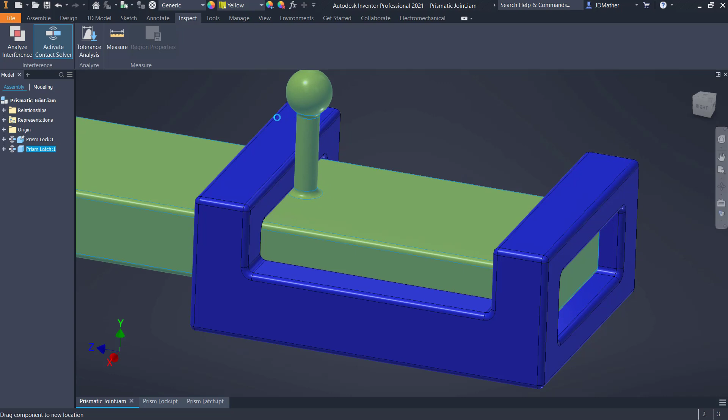In this lab, I want to demonstrate how to create a prismatic joint. So we could put the two parts into an assembly, and put a contact set on those two parts, then activate the contact solver. When we drag this over, it stops when it comes in contact there, and when we come in contact over here. But we don't get any physical dynamics in the assembly environment.

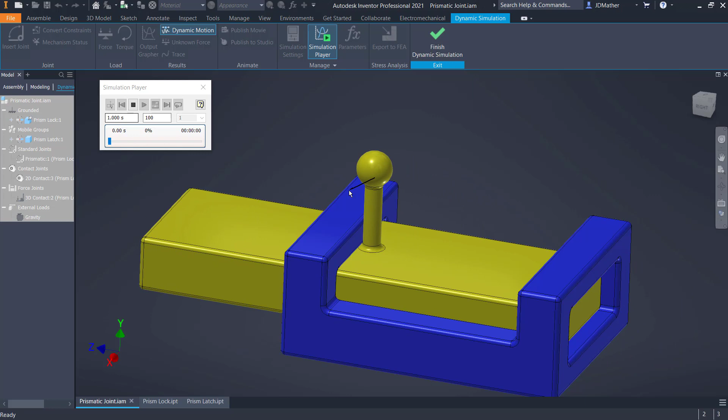It's always a good idea to turn off the contact solver once you have tested out the contact sets. So I'll go to dynamic simulation, and I've set up a 2D contact on this like we did with the revolution joint. Similar to the revolution joint, there is 1 degree of freedom, except instead of being a revolve, it is a prismatic or straight line motion.

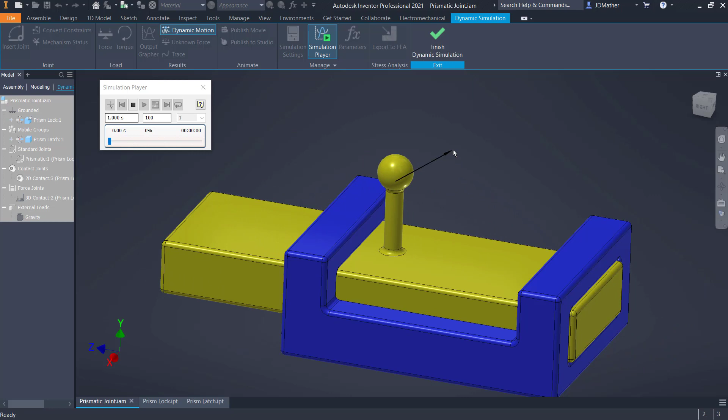And again, we get a force vector on here. The further out we pull on that vector, the more force, and the direction of the force is determined by the direction of the vector. We'll also see in this lab how to adjust the amount of bounce that occurs when we come in contact between the two parts.

If I go to that prismatic joint and look at its properties, we see that it has 1 degree of freedom, and the T stands for translation. So it has one translational degree of freedom. We'll adjust some of these other settings in later labs.

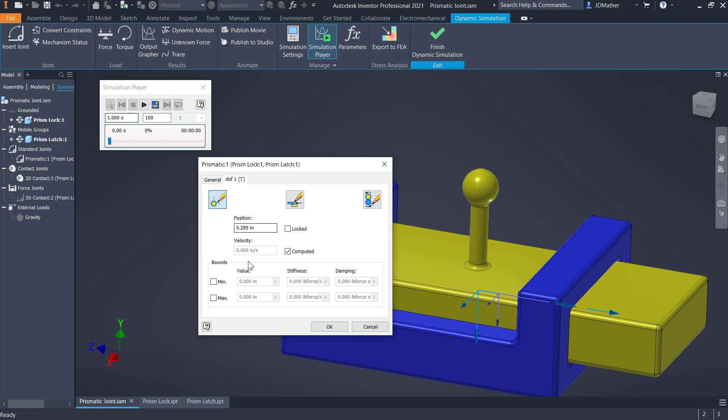So let's look at how to set this up. Again, I'm going to start from a very basic beginning, and we'll work our way up to more complex problems as we go along.

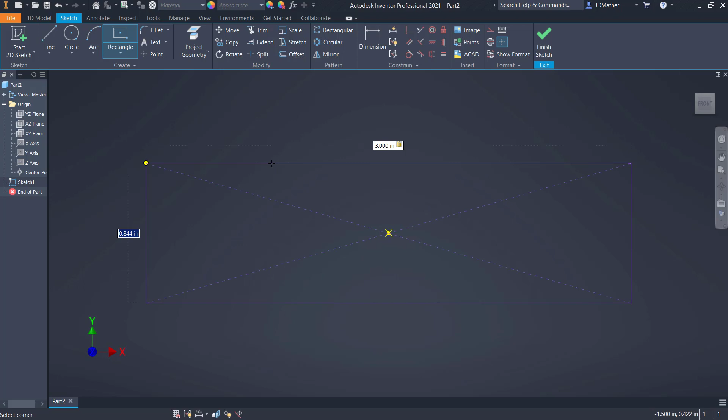So I'll start a new part file, and start a new sketch on the XY or front plane. I will draw a center point rectangle, and make the width of this rectangle 3 inches, and the height 1.5. Then I'm going to draw a second rectangle, making the width 2 inches and the height 0.75.

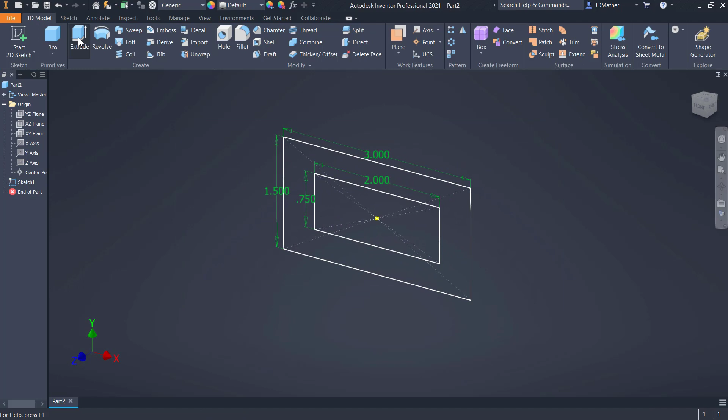My sketches are fully defined. I will do an extrusion, extruding this area. I'll do symmetric, and go a distance of 4 inches.

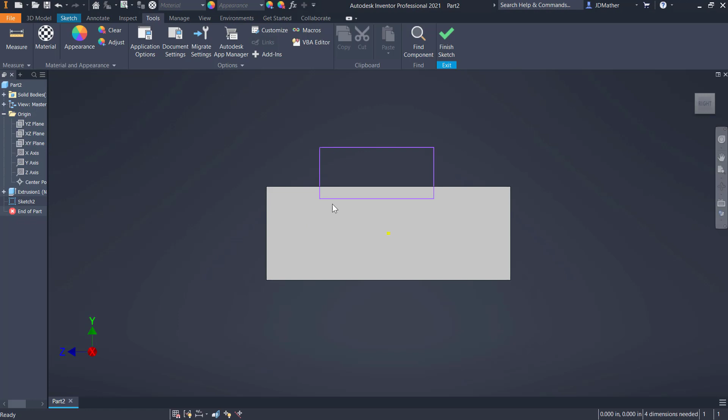Then I'm going to go around to the right side view, and start a new sketch on the YZ plane, and draw a rectangle—this time a 2-point rectangle—and put this rectangle out here in space initially. Now, if you can't see the sketch through your part, underneath Tools, Application Options, on the Sketch tab, increase the opacity of sketch displayed through the shaded model so you can see it through the part. Otherwise it will disappear. You could also hit F7 for slice graphics, which also allows you to see through the model.

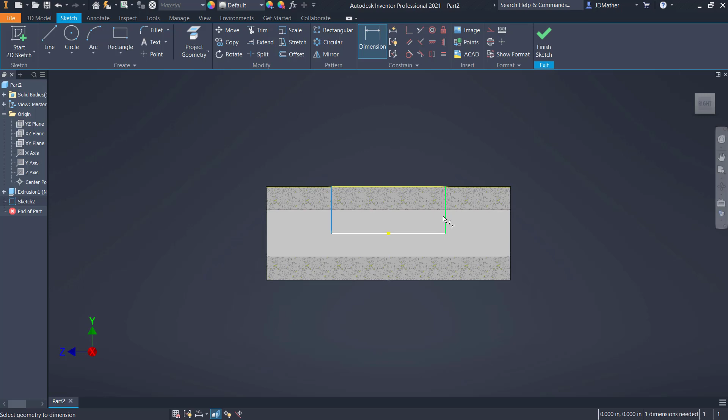I'll go back to my sketch, and do coincident from the midpoint of this bottom line on the rectangle to this point right here. I'm also going to do coincident from this point to the top of the part, then dimension the distance from here over to here, and let's set that dimension as 2.75.

I'll then do an extrude cut through all. So I'll do extrude, and tell it to do cut midplane through all. I'll say OK to that.

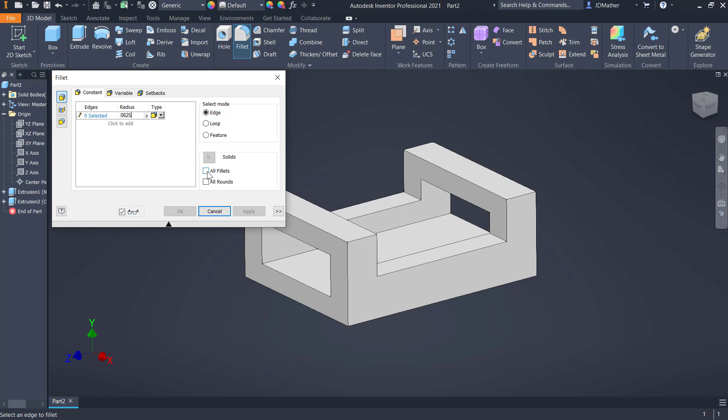I then want to fillet the part, so I'll do fillet of 0.0625, and select all fillets, all rounds, and we'll say OK to that.

Let's go ahead and save this part, and I'm going to call this part Prism Lock. Let's change the color of this part—I'm going to do this as blue wall paint glossy—and save my file again.

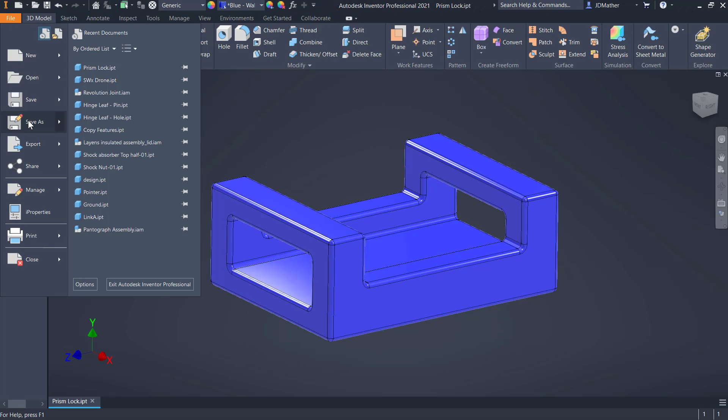I will then save a copy of this file, doing save as, and I'm going to call this one Prism Latch.

Make sure now that you are editing your Prism Latch and not the Prism Lock. I'm going to change the color of this one to yellow—you can make it whatever color you like—and I'm going to drag the end of part marker up underneath extrude 1.

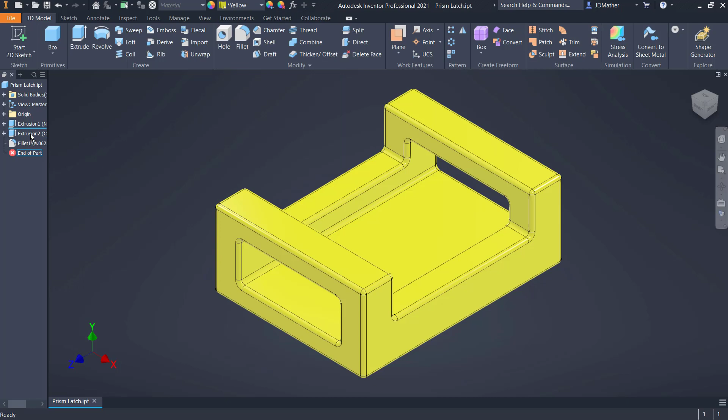I'm going to edit that feature for extrude 1. So I'll say edit feature, control-deselect this area, then select this area here, and change that distance to 6 inches.

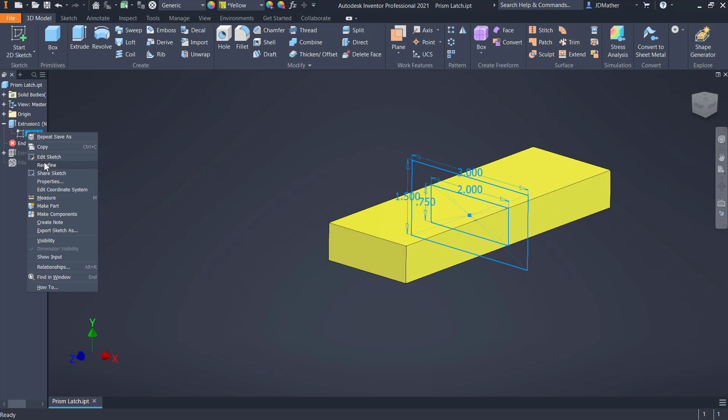I want to add a little bit of clearance between the parts, so let's edit that sketch as well. This was the same sketch that we used to make the mating part. I'm going to subtract 5 thousandths from this, so minus 0.005 inches for this one, and minus 0.005 for this one. So I've added 5 thousandths of clearance.

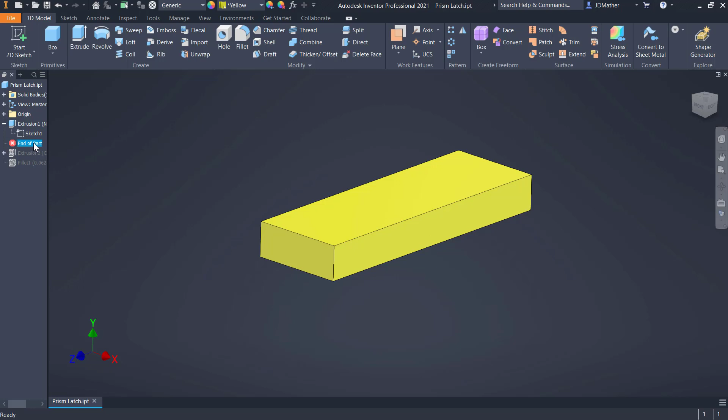I'll then drag my end of part marker down, and edit this sketch. I'll delete this line. When we see a magenta line—magenta or pink—that means that geometry is sick.

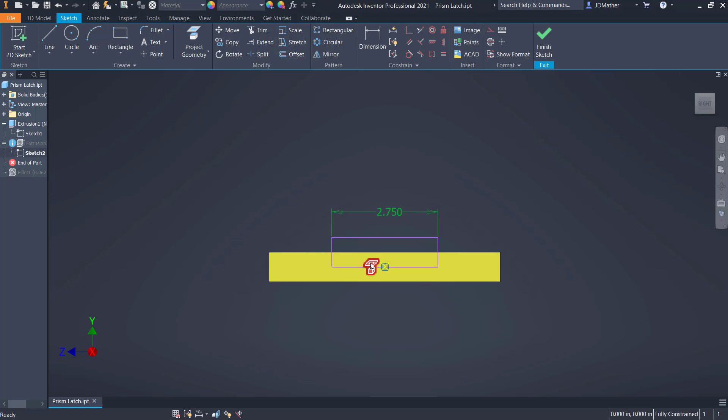I'm going to delete that. We changed the previous geometry, and I'm going to change this rectangle as well. I think I'll delete the coincident constraint, and now I can move this rectangle around. I'll delete this point, and it might have been easier just to create this rectangle over again, but I want to make sure that we see clearly how to do some various steps.

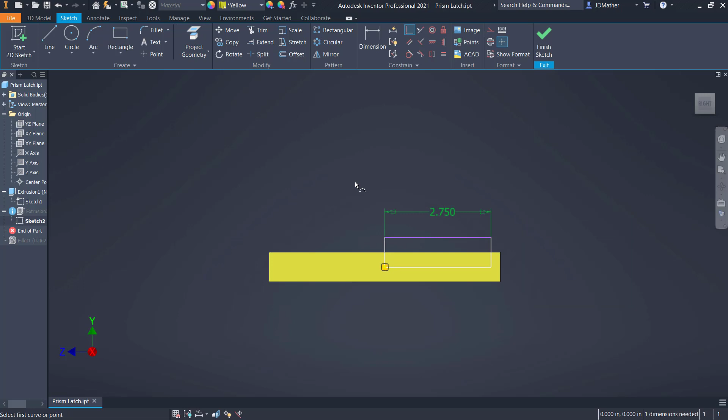I'll do project geometry, and I'll project the center point again, and this time I'm going to do coincident this corner to the center point, and I might hit F7 to go to slice graphics. And instead of this being 2.75, I'm going to put that in as a diameter dimension.

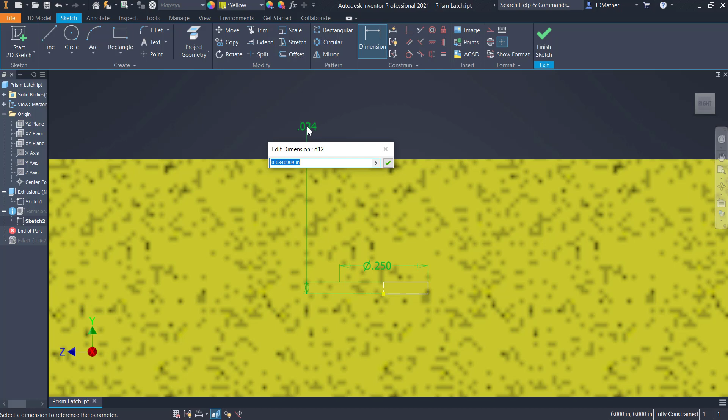I'm going to right click on this line and change that to a center line, and then I'll do a diameter dimension of 0.25. Then I'm going to dimension the height of this as 1.75. So now I have a rectangle, 0.25 diameter, height 1.75.

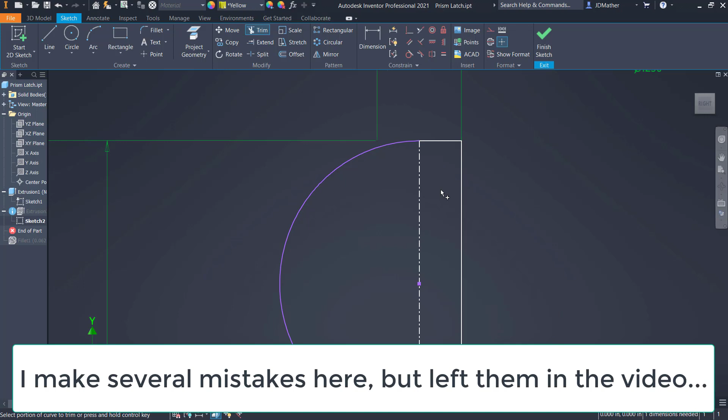I'm going to draw a circle on this line, but not down here at the midpoint. On this line, say from about right here up to about right there. I'm then going to trim away this portion of the circle and this portion and this portion, so I'm just left with this half of it over here, and I will dimension that as 0.25.

I will then do a revolve, but before I do a revolve, let's finish this sketch and delete the extrusion. I don't want to delete the sketch, so make sure you uncheck so that it doesn't delete the sketch.

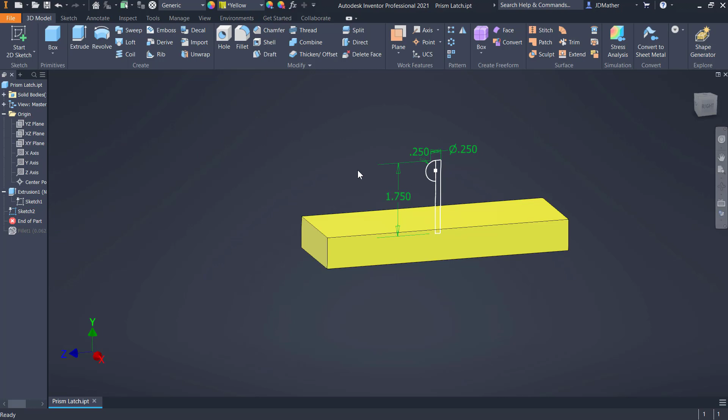I'm going to do another sketch on the right side plane, the YZ plane, and I'll project geometry, this line and this line, into the new sketch, and then I'm going to draw a circle at the midpoint of this line. Actually I might want to put it at a particular location, so let's just put it up here and then over tangent to this line, and I'll change those two lines to projected lines.

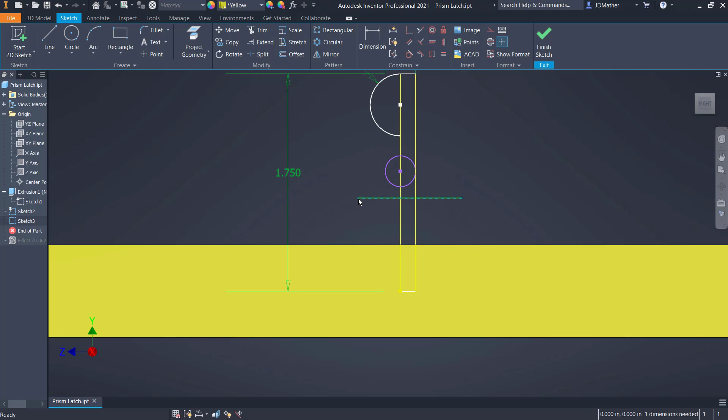Now remember, if I hide sketch 1 or sketch 2, we're now on sketch 3, so we project these two lines from sketch 2, and I've drawn this circle.

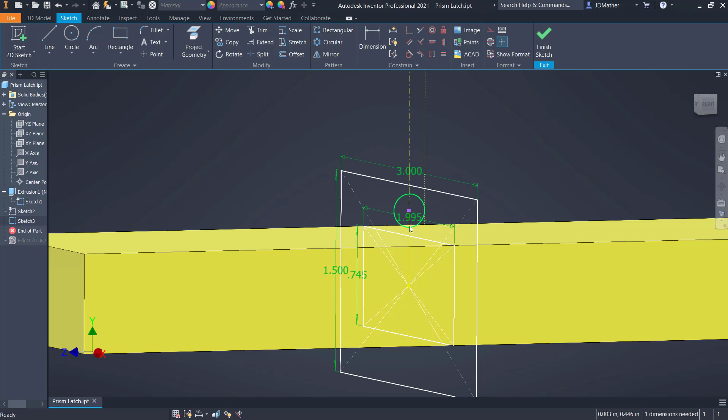Now I want to put that in at a particular height. If I turn on the visibility of sketch number 1, I want this circle somewhere in between here and here, so I just put it in by eye. I'll turn off the visibility now of sketch 1, and then I'll put in that dimension for the height.

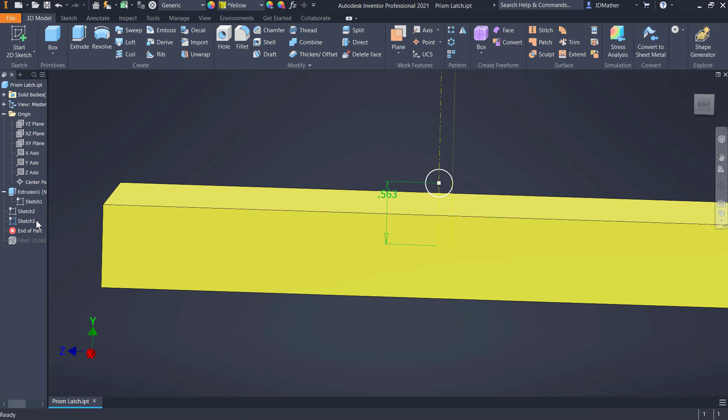So I'll dimension from here up to here, and let's do that as 0.5625. That sketch turns fully defined. Now I'm going to right click and turn off the visibility of that sketch for now, we don't need it. And I'll turn on the visibility of sketch number 2, and then we'll do a revolve.

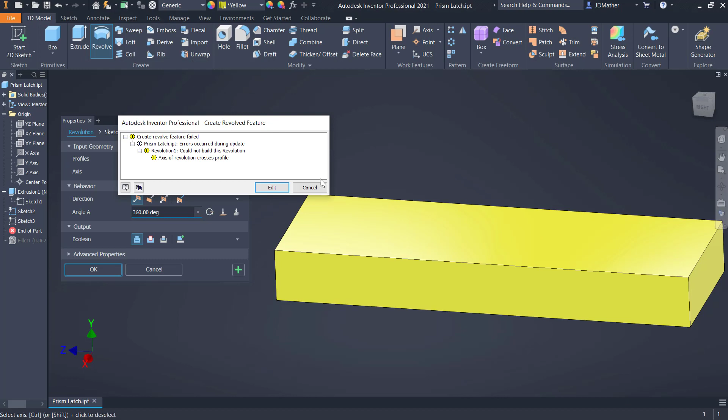I'm going to revolve this area and this area about this axis. And so it gives us an error. It doesn't like that circle being on the other side. So I'm going to edit that sketch, and I will bring this circle back around the other side.

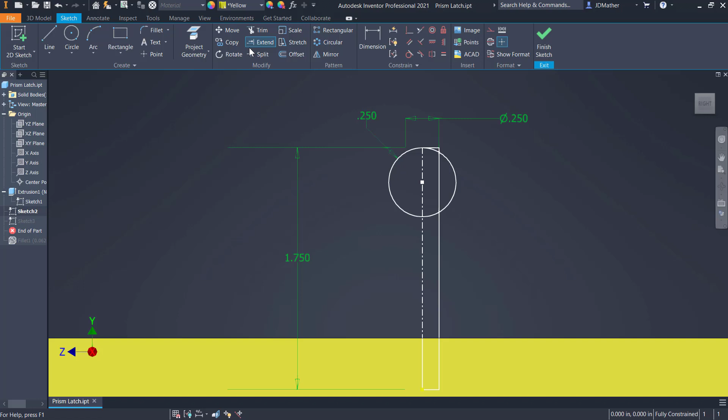So I'll go ahead and do extend and bring that circle, and it doesn't want to extend. There we go. Okay, so I extend that back around, and hopefully we can get that back to a circle, and then I'll trim off this side. All right, now we'll try to do that revolve again.

So I'll do revolve, and I want this area, this area. Now I don't want that corner up in there, and I want that area, and I want that, and now it accepts that. I will drag my end of part marker down for the fillets, and we see that it puts all of the fillets on here, and we will save this part.

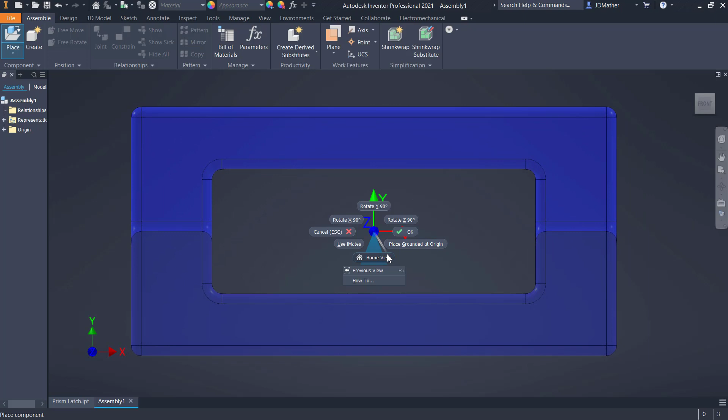Then we'll create a new assembly, and so I'll do a new assembly. I will place the two parts, so I'll place from the prismatic joint, I'll place the lock. I want this grounded at the origin, so I'll right click, place grounded at origin, then hit escape, and then I'll do place, and I'll get the latch, and I'll just click someplace in space to place that latch. Then we'll save our assembly as prismatic joint.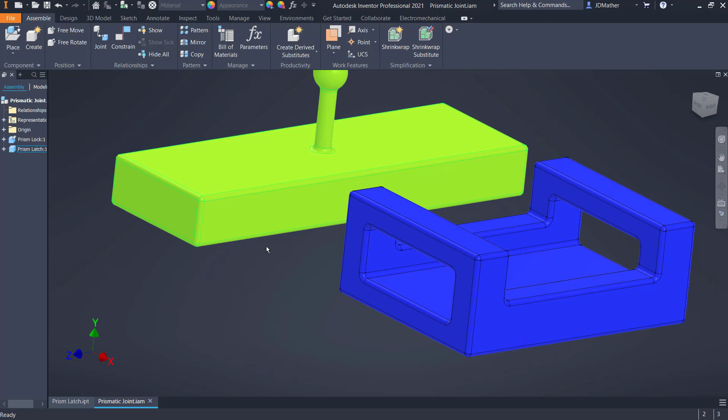Now recall that we allowed some clearance between these parts, so this part is slightly smaller than this hole. In the real world, this face would come in contact with the bottom of that, or the bottom face here would come into contact here, and one side in contact here or over here. In the CAD world, we can use the origin planes to constrain the parts, and that will pay off with a lot of dividends in various things that we do going forward.

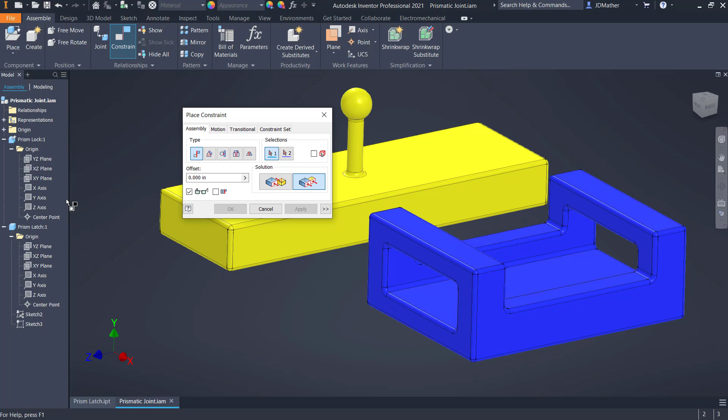So whenever possible, I use the origin planes to constrain my parts. I'll do constrain, I'm going to put it on flush, and I'm going to constrain the YZ plane of the prism lock to the YZ plane of the latch. Then I will do the XZ plane of the lock to the XZ plane of the latch. When I do that, now my part is constrained with one remaining degree of freedom, a translational degree of freedom that we would expect.

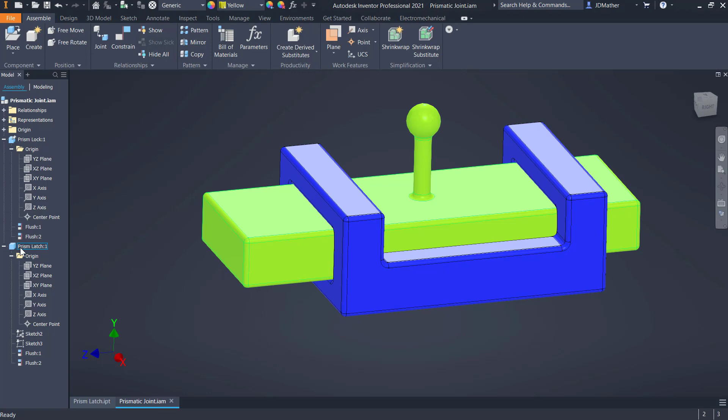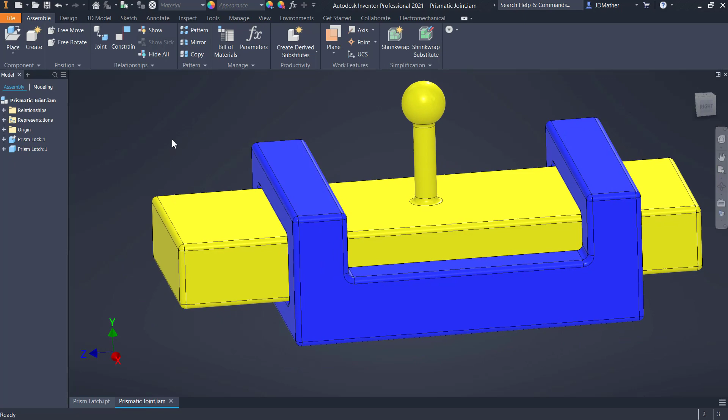Right now it goes right through that part, but if we add those to contact sets, then we see that it will stop when it comes in contact here and here. I did allow a little bit of clearance in between the blue part and the yellow part so that it can slide back and forth. We can't make perfect parts in the real world, so we need to allow a little bit of clearance so that they can move. Even if we could make perfect parts, there would be so much friction between these two parts that you wouldn't be able to move them back and forth.

We'll then go to dynamic simulation, and Inventor automatically converted our assembly constraints into prismatic joints. So if I test it here, it only moves back and forth, but right now it will go right through the part. We'll take care of that in a moment.

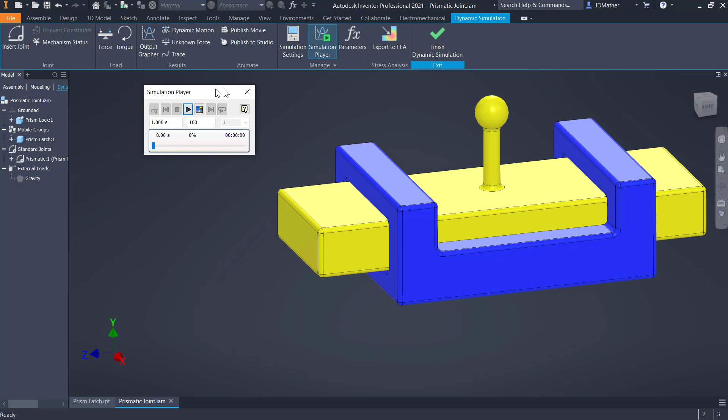We automatically had the assembly constraints converted to a dynamic simulation joint, but let's assume that we wanted to do this manually. Again, if we go into insert joints, you're not going to see all the possible joints that you can apply unless you turn off the automatic conversion. So let's go to the simulation settings. I'm going to turn off the automatically convert constraints.

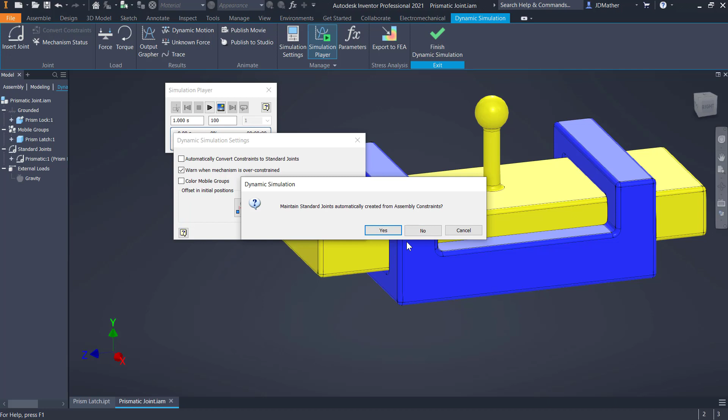Notice right now the latch is in the mobile group, the lock is in the grounded group. I'm going to turn this off, and I'll tell it no, I don't want to keep that prismatic joint. Normally we would say yes, but I'll say no, okay. It moves both of those parts into the grounded group.

I then want to insert manually that prismatic joint. So there are some occasions where you will want to manually put in your joint. I'll select the prismatic joint. Now you can get these, rather than opening up this table, you can get these joints by this drop down list once you know what the names of them are.

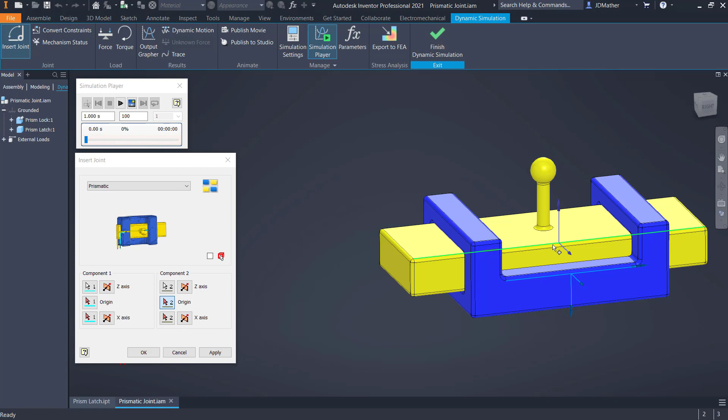Now it asked me to select a Z-axis for this part, for component number 1 and component number 2. But there isn't anything convenient right here to select as a Z-axis. If I select this as my Z-axis for component 1, and then select this as a Z-axis and apply that, it's going to move those two axes together, and that isn't what I want. So I'm going to undo that, and we'll do it a different way.

So I'll do the prismatic joint again, but this time, instead of looking at this in the dynamic simulation view, I'm going to change this to the assembly view, and then expand these origin folders, so now I can select the Z-axis from this part, and then go to the second component and select the Z-axis from the second component. We had to do that by going to either assembly or to modeling tree.

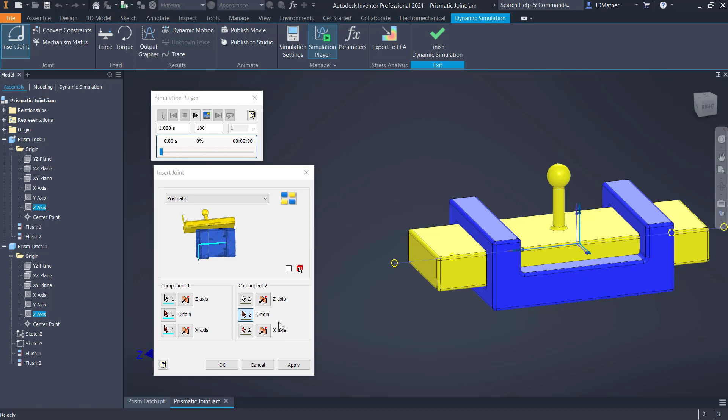If we go to modeling, we can see the same thing, except there's more detail. We only need to see those axes. We'll worry about these origins and these other settings later on. We do need to make sure that the X is lined up with X and Z is lined up with Z, but because we created these two parts in the same orientation, that is already set up by default.

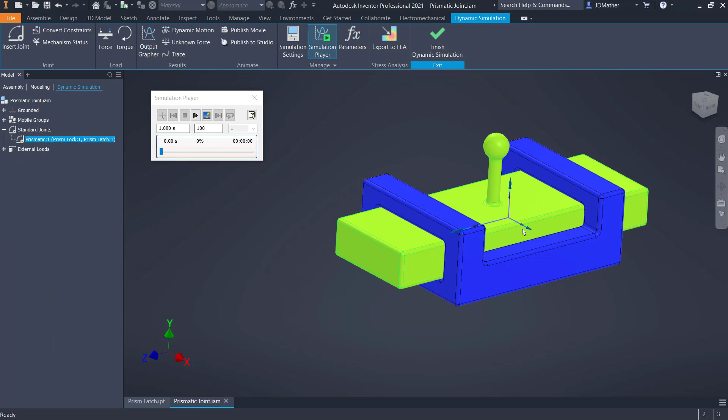So we'll say OK to this, and now we have that prismatic joint. If I come over here to the browser and go back to dynamic simulation, we now have that prismatic joint. We entered it manually, and there are actually 3 different ways to do this: an automatic way, a manual way, and a semi-automatic method. We'll see the semi-automatic method in a future problem.

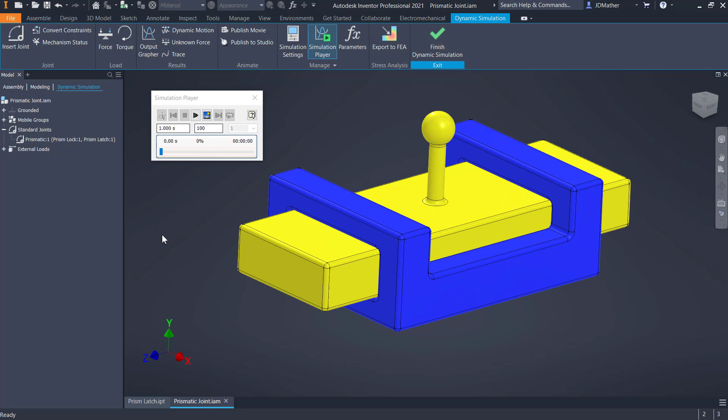So far we've seen automatic and a manual technique for entering that joint, and there are different situations where we'll need all three of those techniques to get the desired motion in our dynamic simulation. Right now this part goes right through there, and we don't want that. So I'm going to go back to the assembly environment, or let's just finish dynamic simulation for a moment.

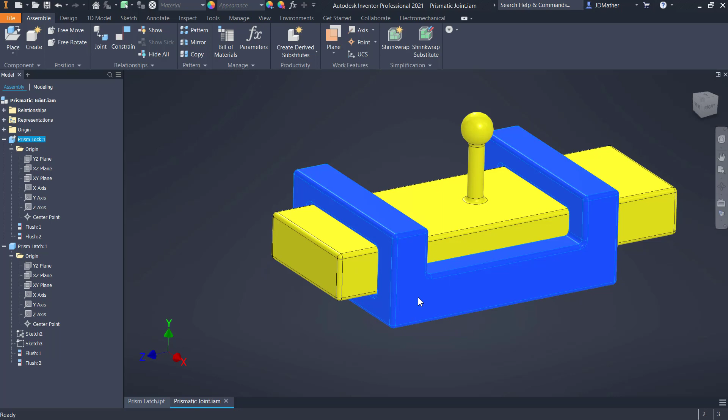I'm going to right click on this lock, the prism lock, and do open. Now you might need to shift right click, put your selection priority on part priority, and then you can either click on it here or over here and open up that part. Let's expand extrusion number 2 and turn on the visibility of sketch number 2, but I want to turn off that dimension. We don't need to see that, so I'll turn off the dimension visibility.

So think of this box right here as a fence, and think of that fence as going to infinity in the x positive and in the x negative direction. So we want to keep something inside of that fence. I'll then go to the other part.

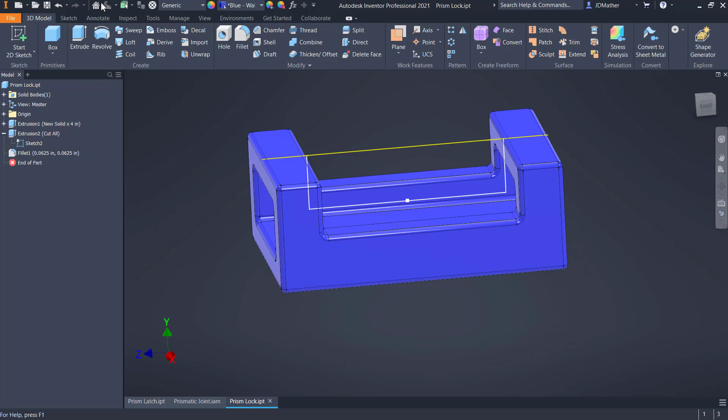Let's go ahead and save this first, and then I'll open up the latch, where we created sketch number 3 with this circle in it. I'm going to hide the dimension visibility since I don't need to see the dimension. I want to keep this circle inside of that fence we have on the other part, inside this box.

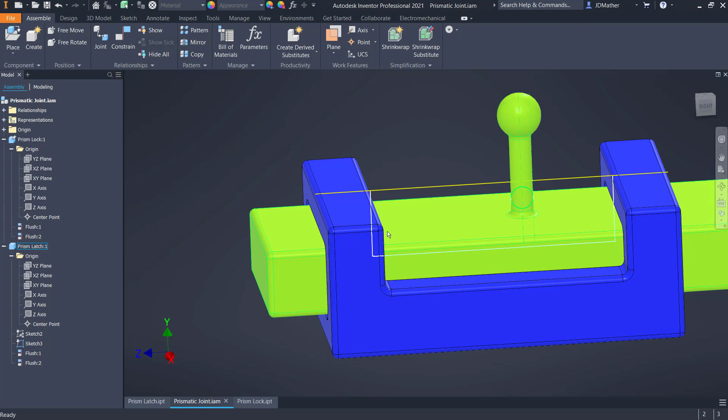I'll go back to Environments, Dynamic Simulation, and add a 2D contact joint. I'll do Insert Joint, and I can either find the 2D contact there or get it from the drop-down list.

It asks me to select a curve. I'm going to select one of the lines on this box. Be careful not to get the yellow line up here, because it doesn't form an enclosed area—only these white lines do. So I'll select this line on the box.

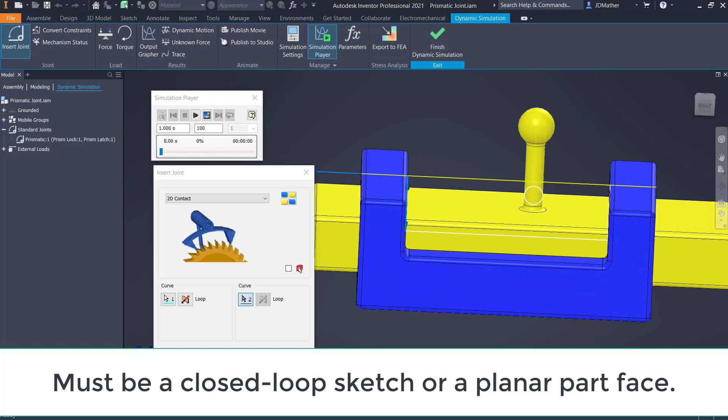Now that box has an inside and an outside, so we could keep something out of the box or keep it in the box. In this case we want to keep it in the box, so I need to flip the Z to the other direction. Now the three-headed arrow, the Z, is pointing inside the box.

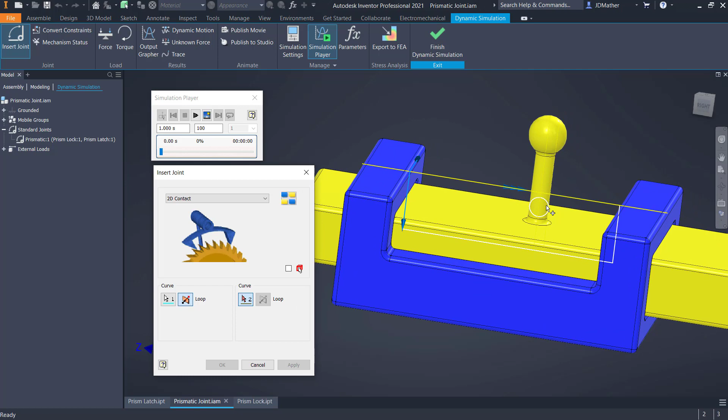Then I'll go to the second curve and select this circle. I might have trouble getting that unless I do Select Other to get that curve. I want the outside of this circle to stay in that box, so the Z needs to point in the correct direction.

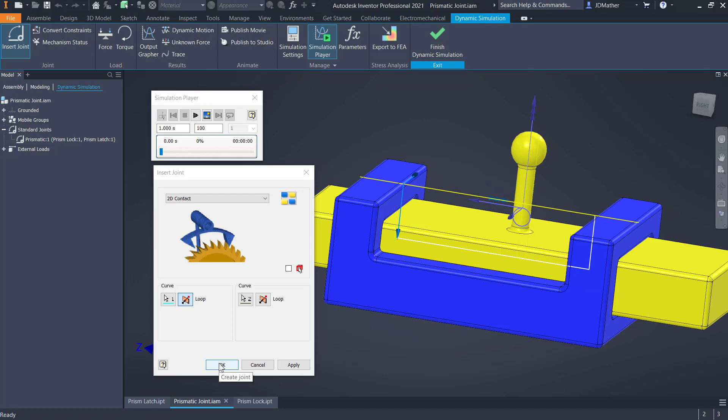If I wanted to treat this as a hole, I'd want the Z pointing towards the inside of that circle. I'll say OK, and now if I drag this, we see it stops when the circle contacts the box over there, and it stops when it contacts the box over here.

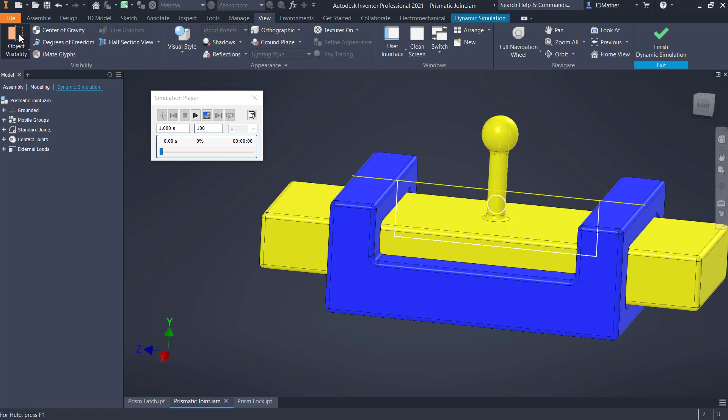We can turn off the visibility of these sketches. On the View tab, if I go to Object Visibility, I'll turn off the visibility of 2D sketches, but everything still works even though we don't have it visible.

Let's look at controlling the amount of bounce. I'll go over to 2D contact, expand the contacts, right-click on 2D contact, and go to Properties. Notice there is a restitution value and a friction value.

Think of this restitution like a bowling ball dropped straight down onto the floor. If restitution is 0.8, and I drop it from a height of 3 feet, it's going to bounce back up 80% of that 3 feet. If I put it at 0.5, it bounces up halfway of whatever height I drop it from. If I don't want it to bounce at all, I put it at 0.

The amount of bounce between the parts depends on the material the parts are made out of. So if I have that bowling ball and drop it on a carpeted floor, it's going to bounce a different amount than if I drop it on a concrete floor or a wood floor.

These values would be determined by doing physical experiments and recording the results. There may be somewhere on the internet to look up relative values, but normally you'd have to do experiments to figure out the appropriate value, or from experience, guesstimate what would be appropriate for the restitution.

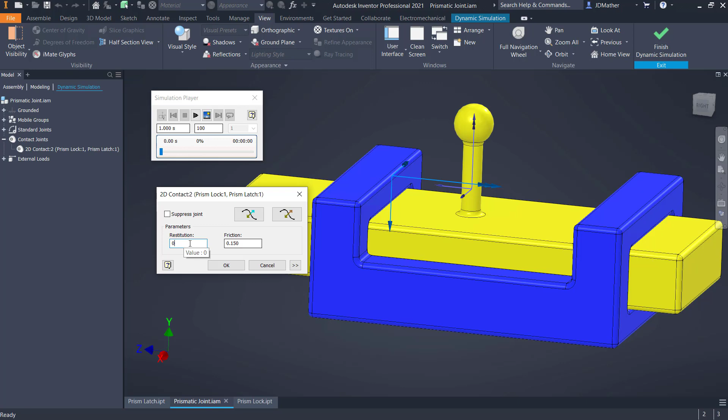We'll leave friction as it is for now. So if I put that restitution on 0, now when I drag this over, when it comes in contact, it just stops. When it comes in contact over here, it just stops—it doesn't bounce.

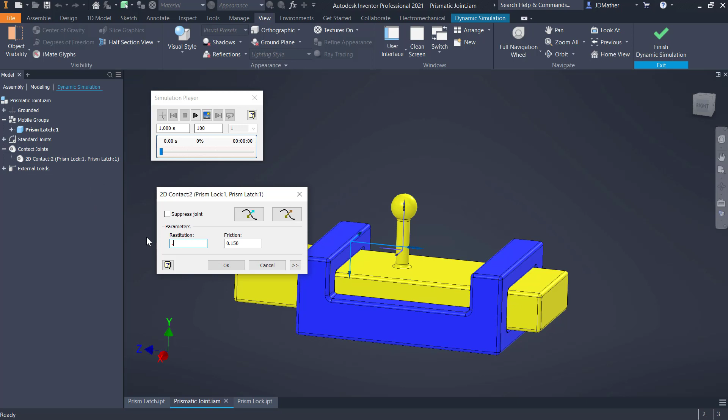So we need to adjust that restitution to an appropriate value for our material properties. Now I have just a little bit of bounce on this.

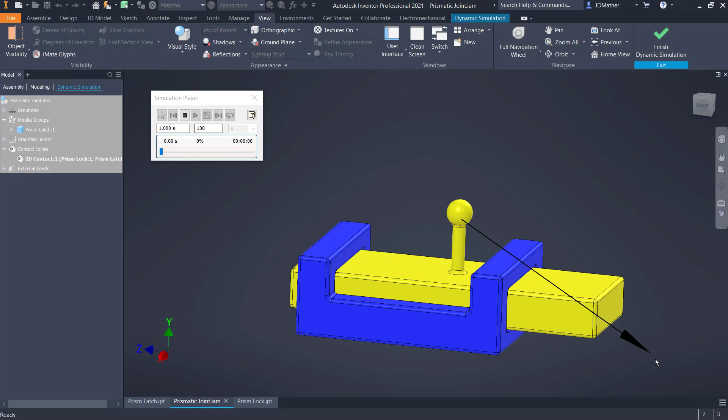Again, if I go too fast, I can end up outside of the valid location because the computer can't keep up with the calculations. Sometimes if you get outside of it—I'm trying to get outside—you can't get back inside. I'm going to leave it out here, and if I try to get back inside, it gives me an error saying it can't get back inside.

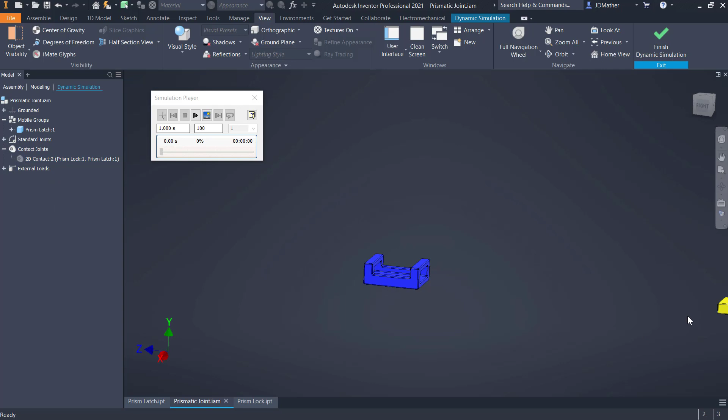So I have two choices: I can either delete that and put it in again, or undo back to where it was in a valid condition. A lot of times though, with a complicated assembly, the best way is to temporarily suppress that joint, move it back into a valid position, and then unsuppress to make it active again.

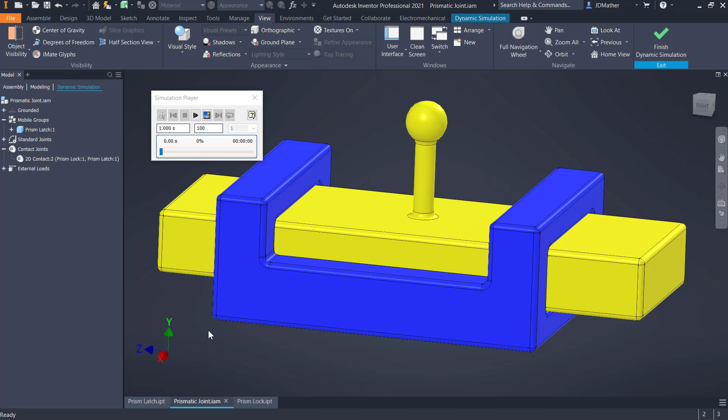And so now it's back inside the grounded part. That is a translational constraint with 1 degree of freedom and a 2D contact with the restitution.